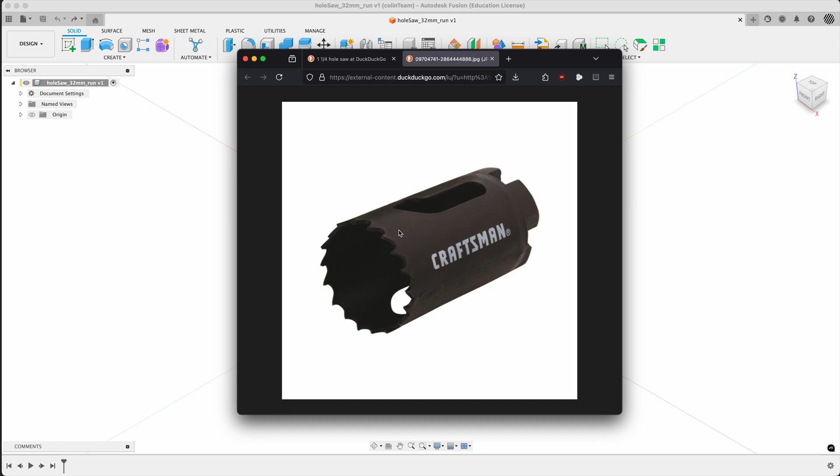We're going to draw our model, something like this, not this one in particular but similar. This is a fairly generic part, I believe from China, and they're good at this. We are going to model some of this, focusing on these teeth, particularly how they move in and out. We'll see as we go along what that means.

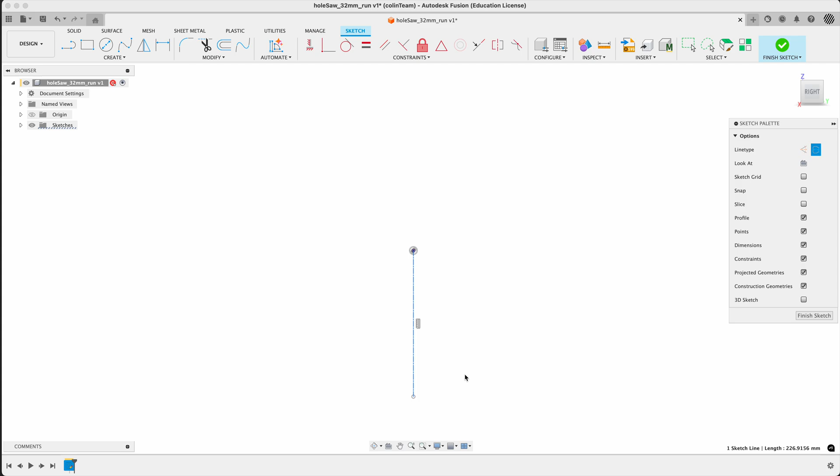We're going to start with a bunch of sketches, starting on the right plane, from scratch. The key thing is to keep it under control as we go. This is going to be a long and involved process, but I want to make a point of how this might be modeled and how patterning it is maybe not as obvious as it seems.

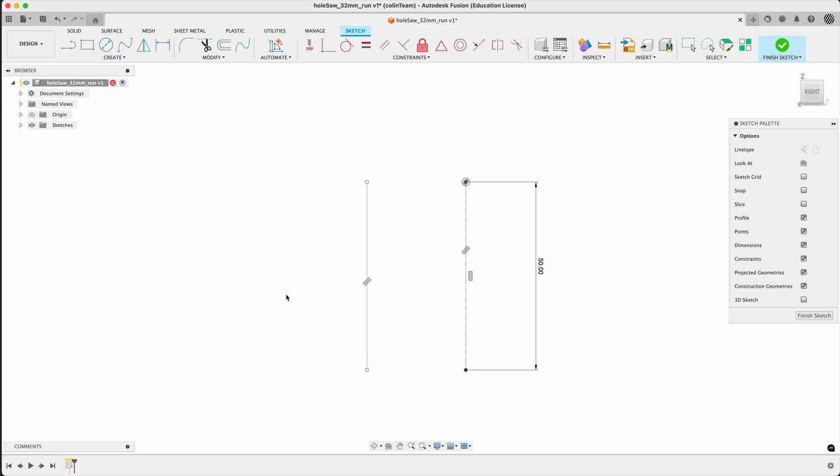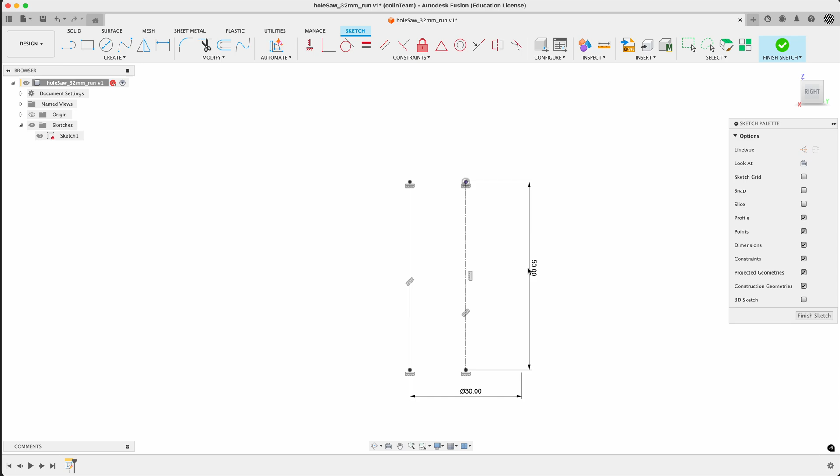Just setting up here, I'm going to make a plane, a surface revolve that's going to keep my part organized, and just working away bit by bit. Now you can see we're getting out of control. Sketch one isn't fully working, but the goal is to try and keep everything organized, doing tests as we go to make sure it all works.

So what are we going to do here? Finish the sketch, make sure everything's working right. This is a millimeter part. The guide I'm using is actually in inches, but we're going to convert over.

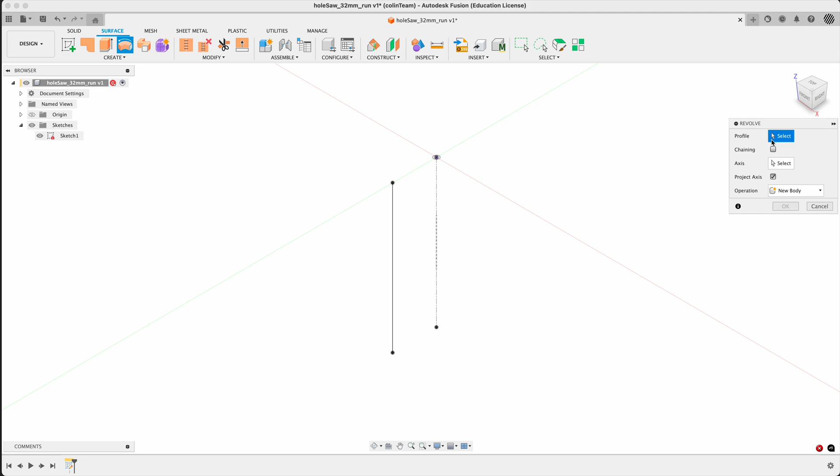It's selecting a profile that's not what we want, and maybe our axis is not what we want either. Let's make sure we've got it right. This is our profile, and that's our axis. Now this will make a surface body. If we look at it from the top, there's no thickness here, so we're going to start with surface bodies.

Let's keep things under control by renaming things, profile_lateral. And we're going to have some profile teeth coming here. Now the tooth is 3 millimeters high, and I'm going to put it in the middle here. We'll use that to actually control the second sketch.

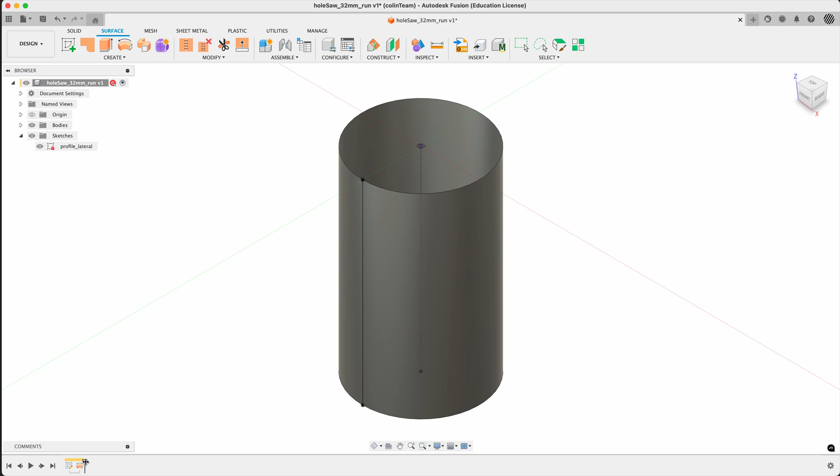So I want to insert this at the front. Let's do a sketch on, doesn't matter which plane, we can use the same one, why not. I could put it all in one, but I'm going to make a point here. It's feasible to do this in one. Oh, doing this wrong.

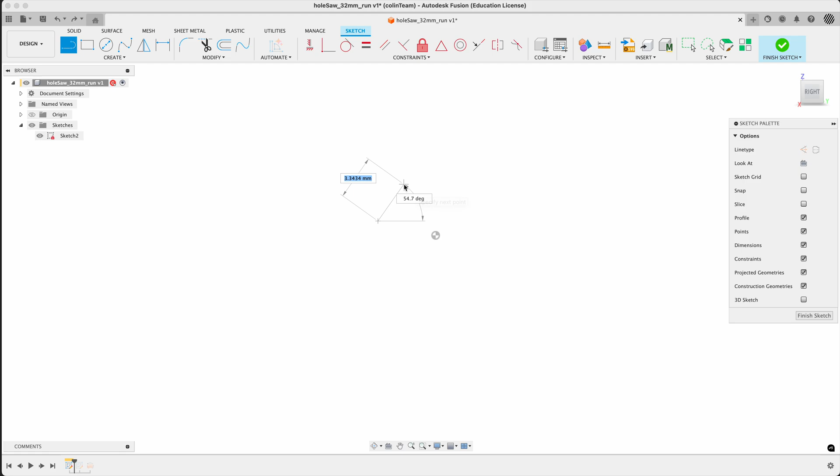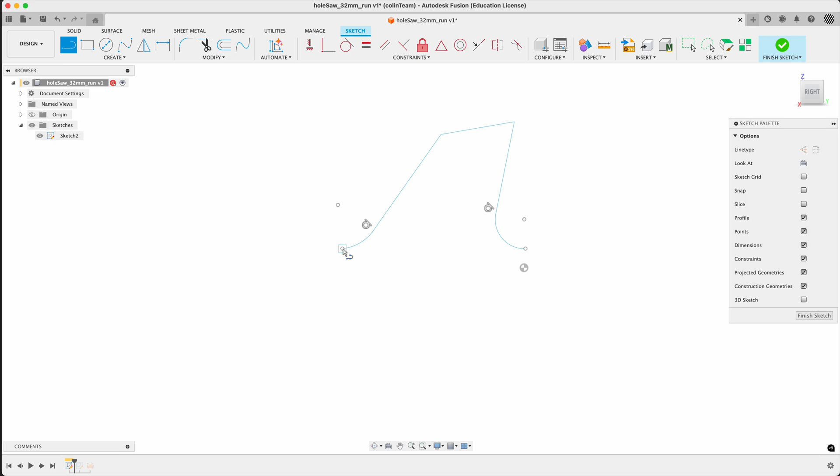I'm going to start by drawing this quite small, trying to get the size about right, about 3 millimeters range. Just get started up here, finish it there, pull this one away as well, try and get it lined up. Oh, missed that. Line these two guys up as best we can. There's our origin there, so we're in the general vicinity. To move it all at once, just draw a box around the whole thing so you don't yank it out of turn, and arrange it somewhat like that.

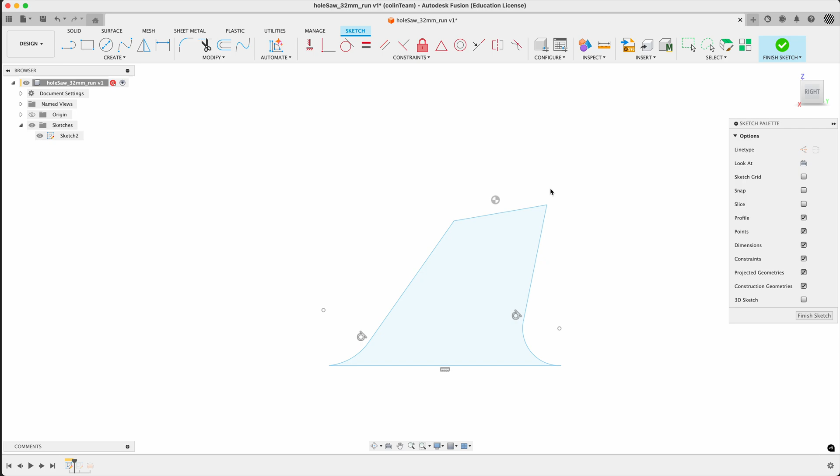And when we put our first dimension on here, we're going to start - like it'll get resized, we hope. So let's go for the full height, and that's 3. Let's make it obvious where it is.

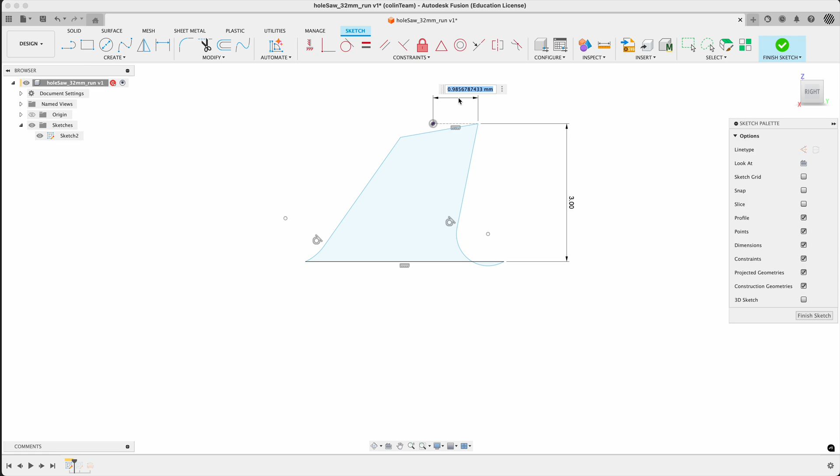That's our origin, so I'm just going to turn that into construction and then make it horizontal. Dimension that - to the origin, the outside tip is 1, and the opposing is the same. You can use a little formula if you wish, it's up to you. This angle here at the top is 15.

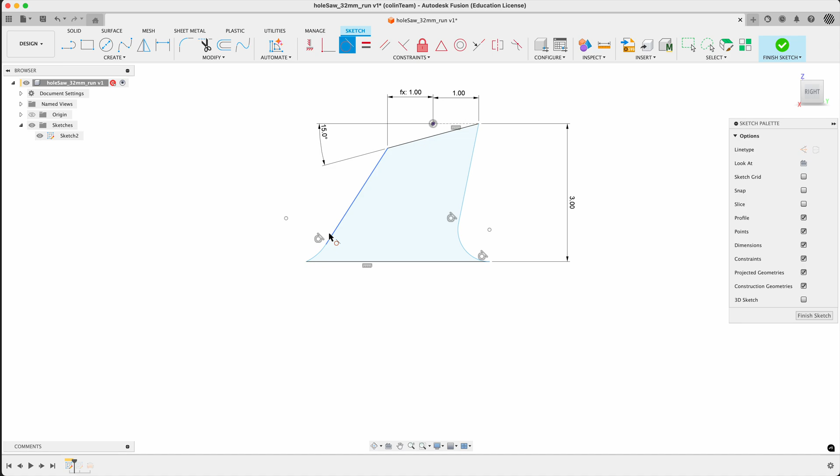So this is like a kind of cutting tooth, and we're going to go along here and just keep this all running smooth as we go. If anything jumps out of place, we'll just undo and redo. This seems crazy - we're going to use this to cut things away, so this is not going to be a zero thickness tip here. Just going to keep our eye on it though.

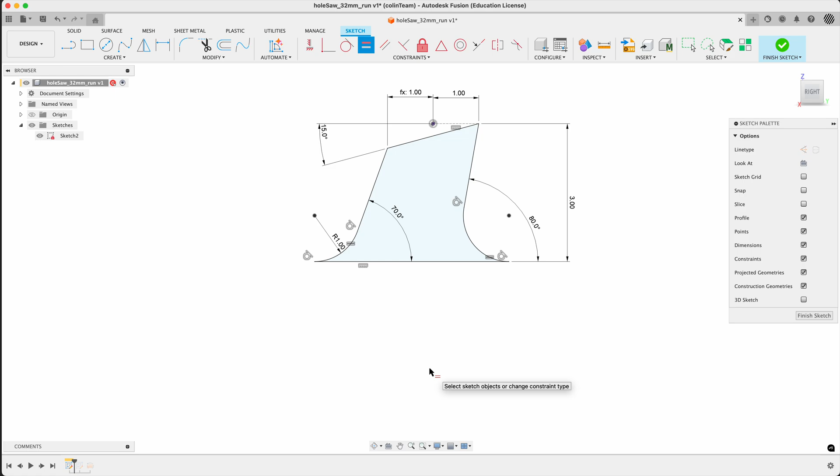So this angle here, the front angle is 70, back angle 80. This is 1, and these are equal. It's looking okay, that's about what we want. So fully defined - that's sketch 2.

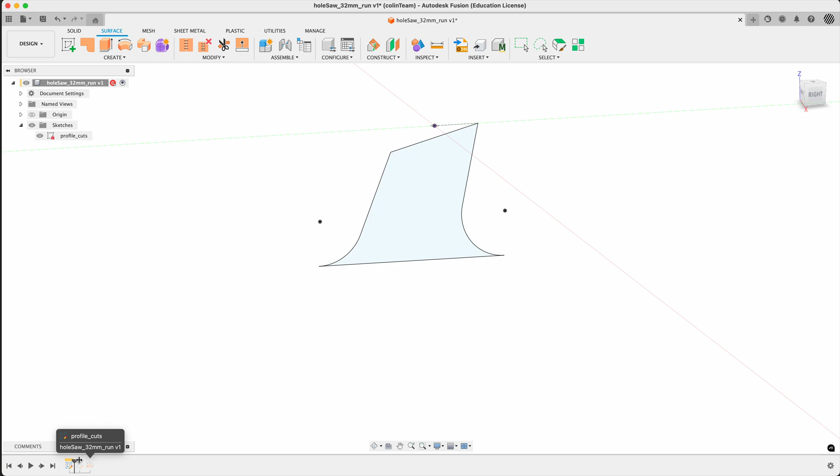Let's finish that sketch and call it profile cuts or something like that. This is again going to be our first sketch - I don't like that, let's rename it, underscore cuts. Perfect. Then when we pull our playhead out, we can see where we are. So next sketch, the first sketch we did.

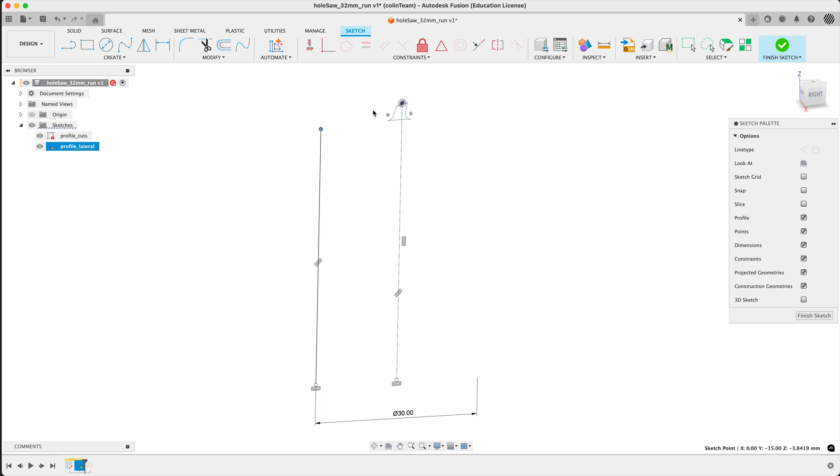It's going okay. Now what I want to do is add - I want to have this stick down 50, so the tip of the thing is here. So I'm going to actually change this around a bit. Let's edit this sketch, and I'm going to get rid of that constraint because I want it to go this way. So I want this actually lined up with the bottom of my tooth profile.

This is very important because we're going to do some trimming later. From here, I want this part to be 50 again, so let's dimension that one more time. From end to end, it's not 46, it's 50. Perfect, so we've shifted things around to accommodate the tooth.

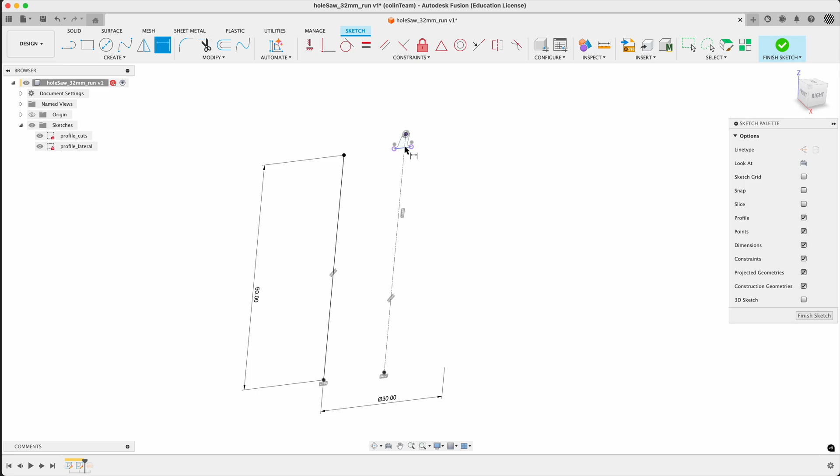And next we're going to go ahead here and see how this works. I want to cut this tooth into my sweep, into my revolve. Let's finish the sketch and go to the end.

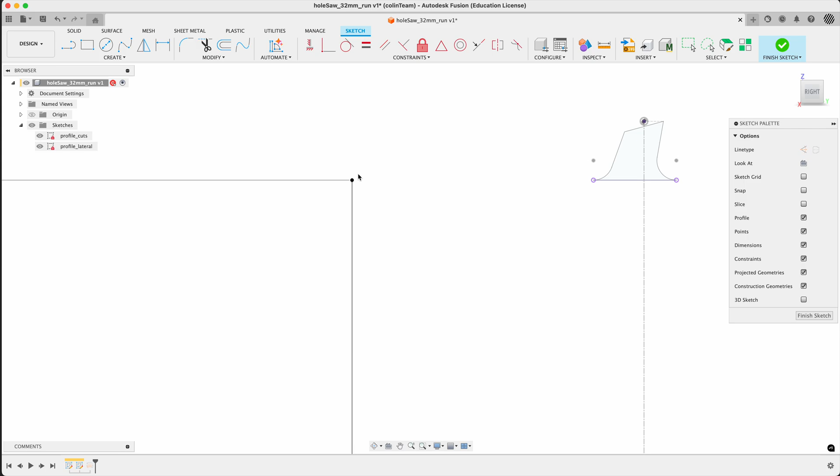Okay, so I need to add more to the top of this revolve. Let's edit the sketch. Problem with these teeth is they go out alternately. It's hard to see on this, but one sticks out, one sticks in. There's 16 teeth.

So let's do some thinking here. I'm gonna say one is gonna come outward, so that'll be tangent. Let's go across, come back down, and may not get it right. So just drag things around a bit. Whoa, let's not do that.

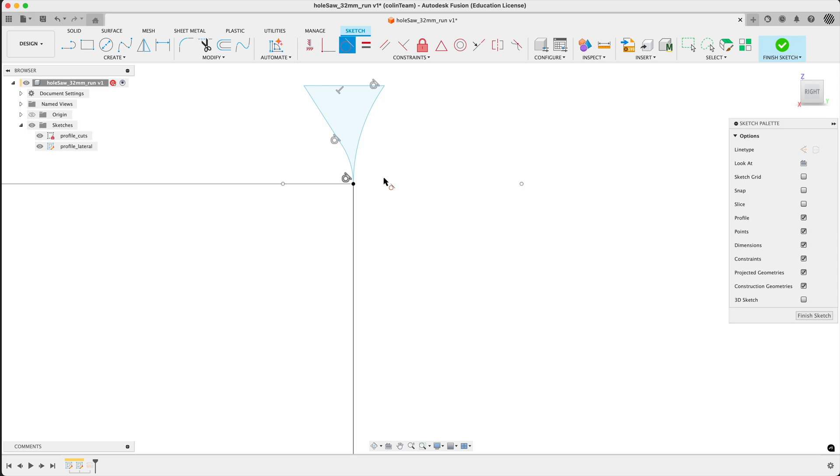Sometimes it's hard to drag, so you just pick them both. Constrain them all up, and we want to go ahead and get these all lined up. Try and keep everything kind of samey. Don't need this top edge except for construction.

What's this perpendicular to? Don't know. I want it to be horizontal. So let's also make these two guys horizontally correct.

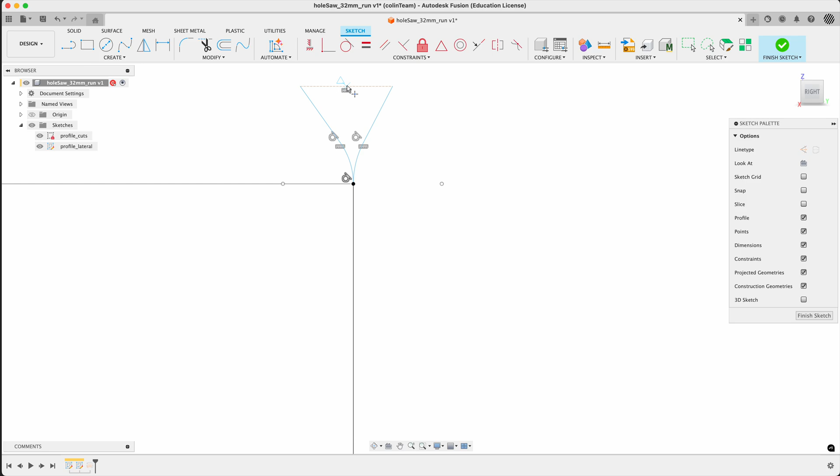And if I put a point here in the midpoint, wherever that was, there it is, and line it up with the line underneath, we can get some crazy stuff. Hold on here.

So just keeping this under control. Oh, that's not quite right. There we go. So what's our dimension here?

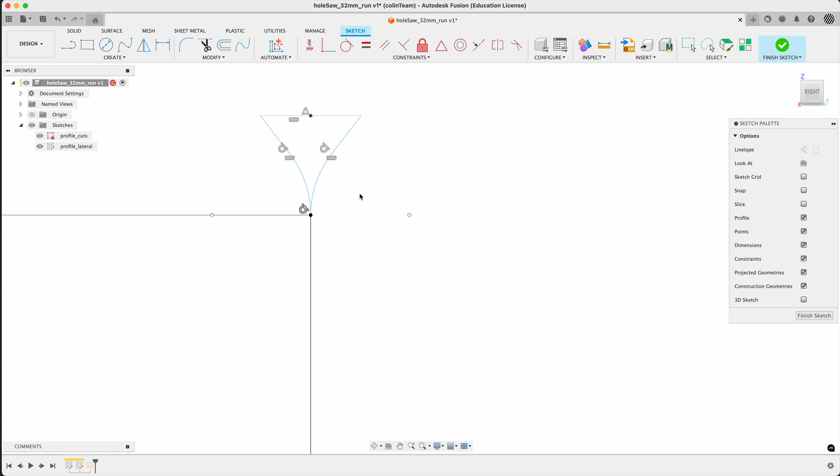I wrote it down somewhere, you can hear me rooting around here. First things first, I want this line to be coincident with the vertex - or sorry, not the vertex, the origin - because we want this to line up at the top of our tooth. Perfect.

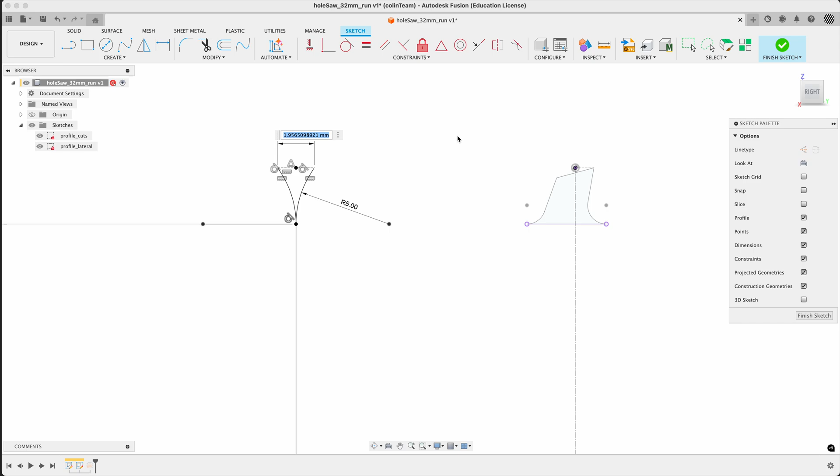I'm going to put some dimensions and stuff like this. So let's make this quite gentle, 5. And I measured the piece that we have quite a bit - it seems to be 1. So the movement of the teeth from side to side is 1 around the midline of our shape.

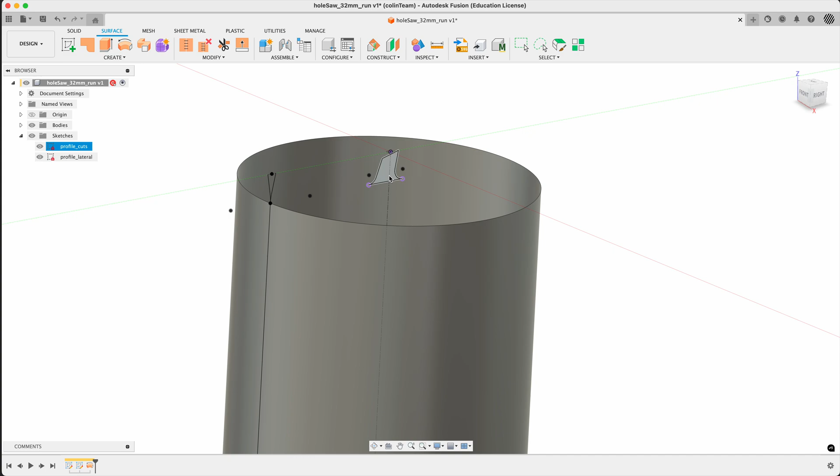So this defines everything for us. Right now you're wondering, okay, that seems fine. So finish the sketch. What I want to do is trim a top shape alternately with this profile here. I'm going to come back to this in a second, but I need to make my teeth.

One temptation is to make this whole thing twice and cut it away. This is, after a bunch of testing before I made this video, complicated. It's actually easier to use surfaces - we're going to go through here and use features like crazy. But what we're going to try and do is keep it managed, which is most important here.

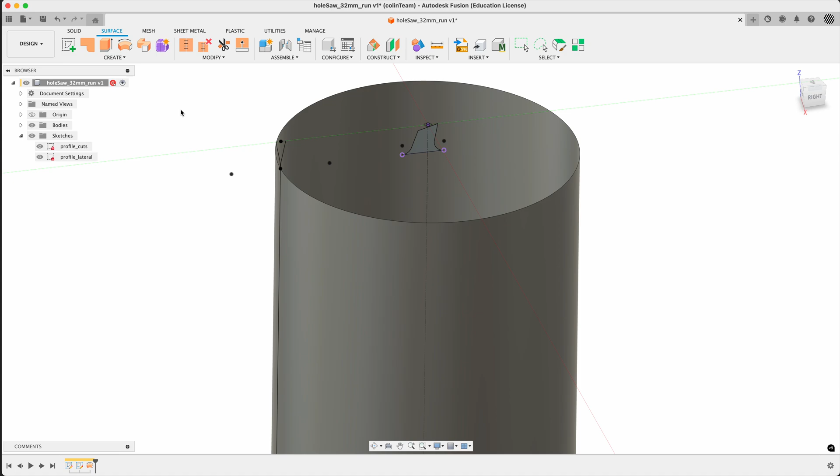So let's go ahead and do another revolve. I'm going to hide the body I've already made, body 1. And it's pre-selecting some stuff here, so let's be clear what's what. What I want to do is pick a profile, turn off chaining.

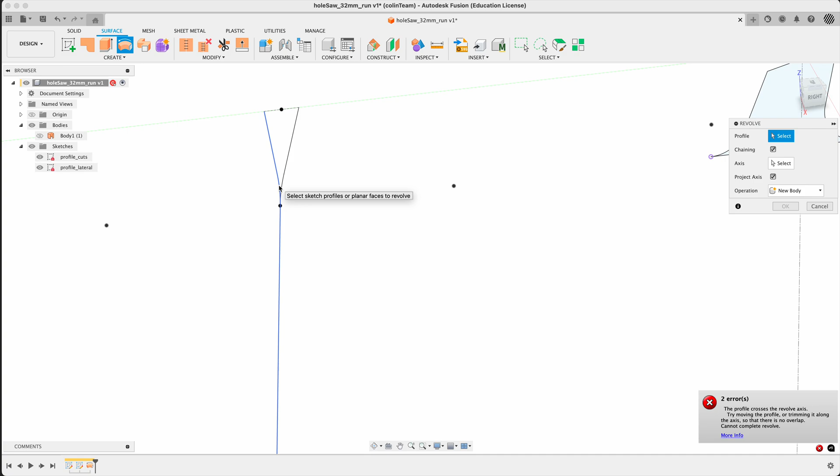Let's do the outside one first. So turn off chaining - there's my profile. It shows as 1 because it's tangent. Axis is that middle one again.

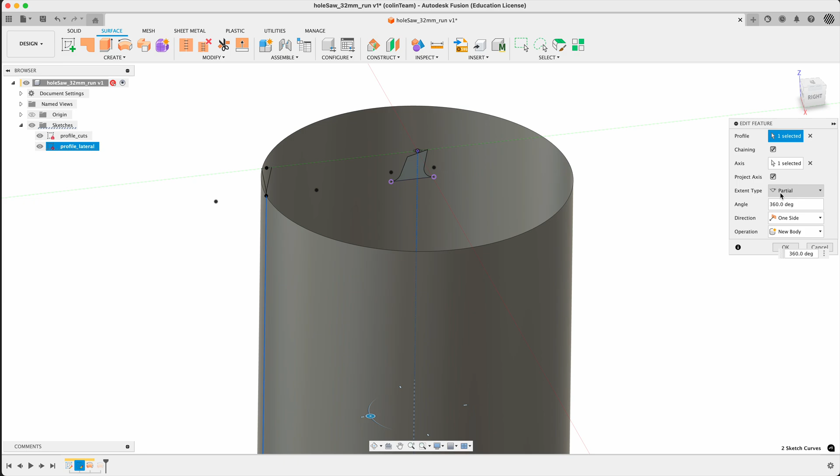New body - you can do full here if you want. Sorry, okay, let's go back and check the other one's full. There we go, 2 bodies.

Do it again for the inside one. It's not my redo buffer. Again, it's pre-picking some stuff that I don't like. Let's do it manually - chaining is turned off, and the axis is this.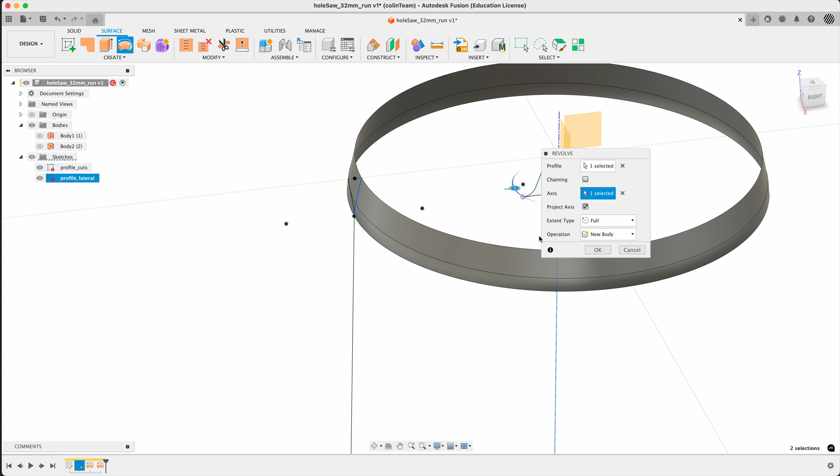Full, okay. Hide the sketches for a moment, have a look at the bodies. Looks good.

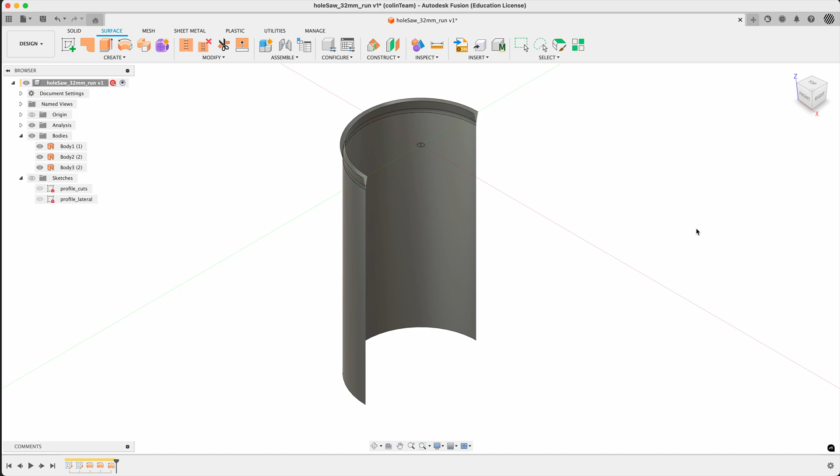I'm going to do an inspect here so I can see through things. If I can get it to pick a plane, there we go - Shift N if you want. Oh nice, yellow - there's all my shapes.

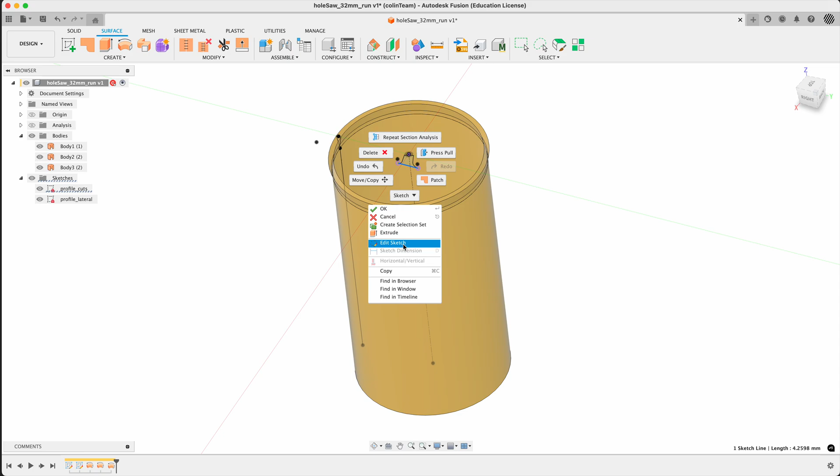What I want to do here is actually split the part with this sketch right here. There's various ways to do this - you can use just the sketch, you can make shapes, all that sort of stuff. I'm just going to edit the sketch here quickly to get rid of this extraneous line.

I'm going to turn it to construction. So we've got our tooth shape. What I want to do is actually make it - I've found it easier to make an extrusion here also as a surface and give it some length that you know is going to extend.

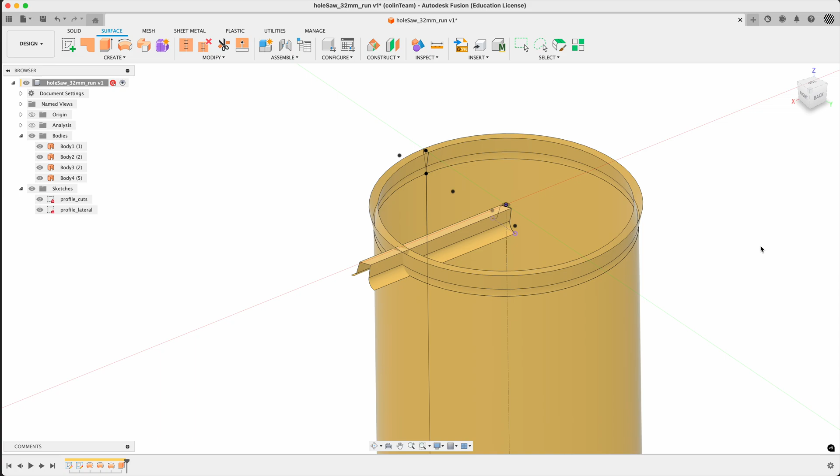We can use parameters for this, but for now let's just make it 20. I can actually split these surfaces with this surface extrude - see how this works in a minute.

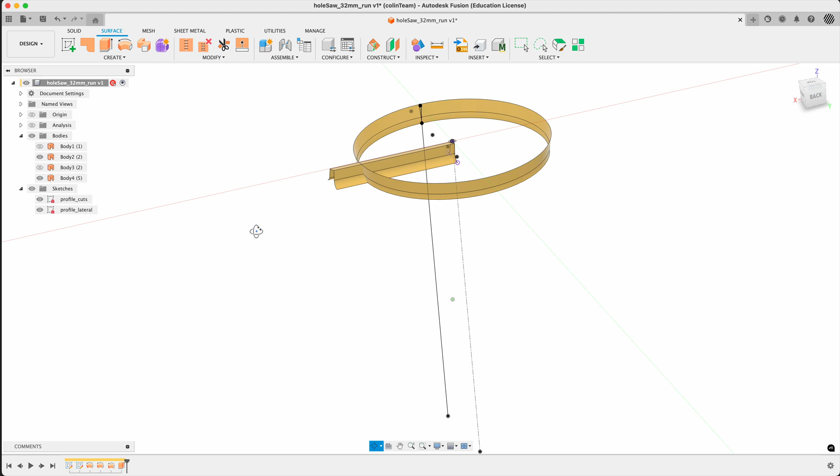So first, I'm going to go ahead here and do a little test run. First body is not really helping me right now. I'm going to do the outside first, so make sure the right ones are showing so I'm not confused here. Can even hide the sketches if you wish.

So my goal here is to use this tool to split this surface. So let's try that - split.

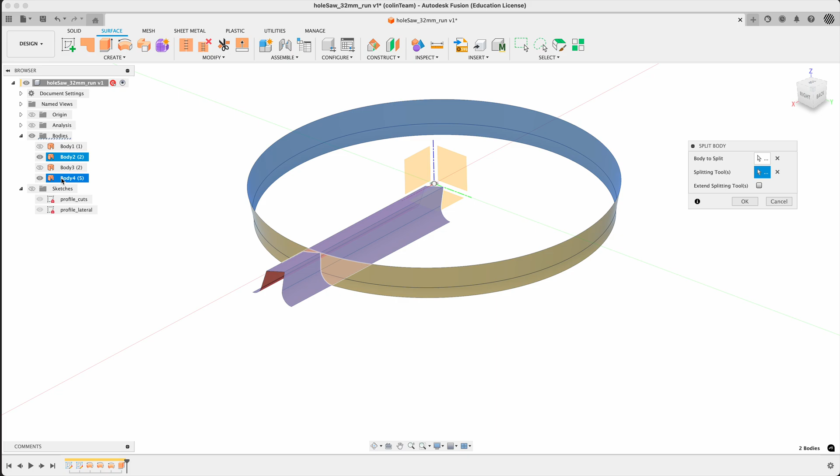Split Body works on all sorts of bodies. Body to split - well, that's this guy. Splitting tool, that's sometimes easier to pick in the browser. Looks okay, you don't need to extend it or you'll get both, just that one. We end up with extra bodies.

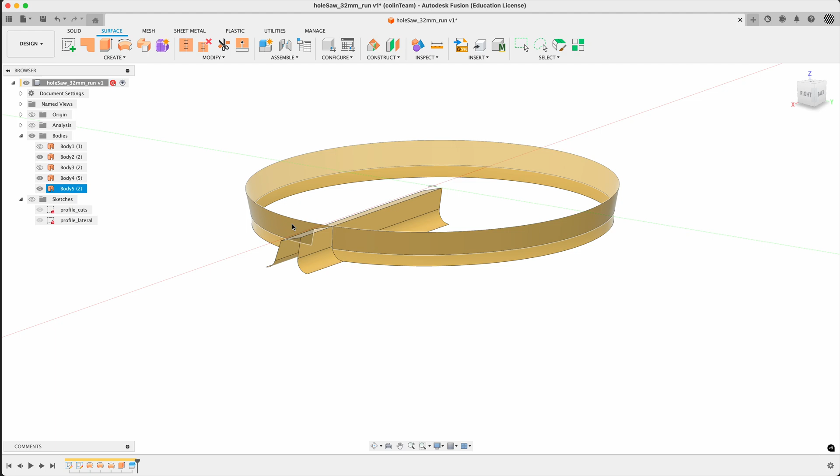If you wish, we're not going to need this anymore, but what about the other side? So the goal here is to see if we can figure out what to do. Just press delete there first. We end up with this interesting little shred of a body, which we can attach later to this bigger body. That's what's going on. So given all that, let's hide this again.

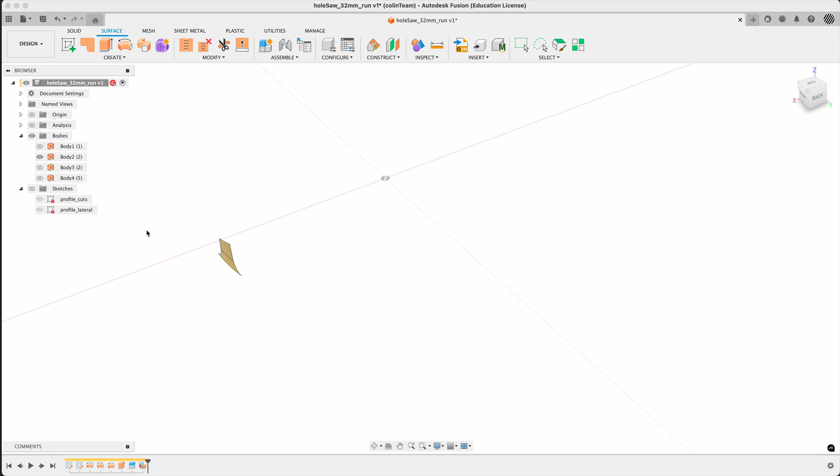Show - is it this one? Yep, and this body? Yep. Now before we do the split, let's go ahead here and actually multiply up this one that we're interested in, this body 5, body 4, whatever we want to call it.

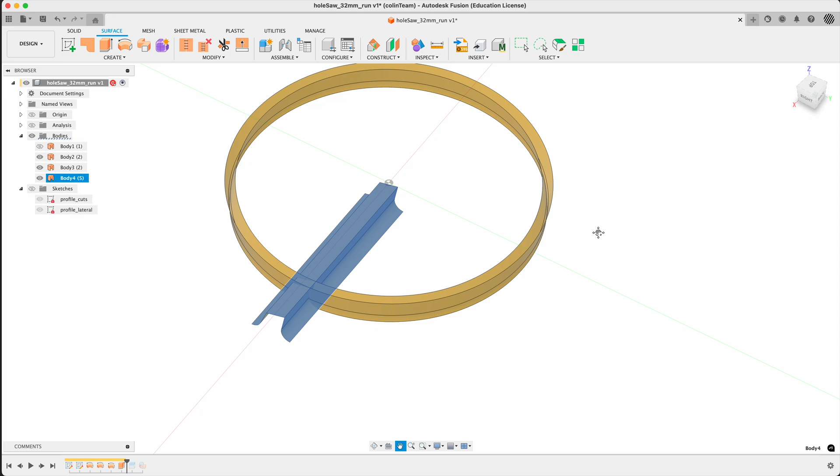Easy way to do this, we have 16 teeth. You can use the move command, which is okay, there's no problem with that. However, it's hard to use parameters with it. One good way to do this is actually to make a pattern.

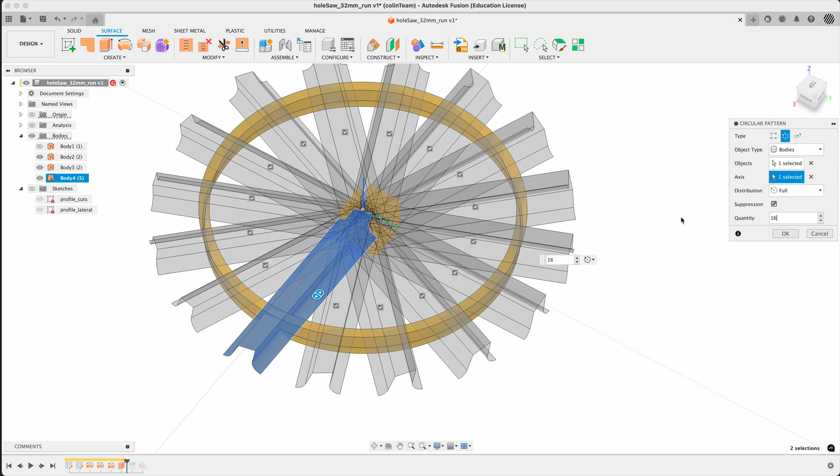Circular pattern, bodies selected, axis Z, number of teeth - now we don't have number of teeth, so hold on here, it's 16. We'll put a parameter in this in a second here. So 16 teeth. Strange, and you think well that's a lot - that's more than I only need this one.

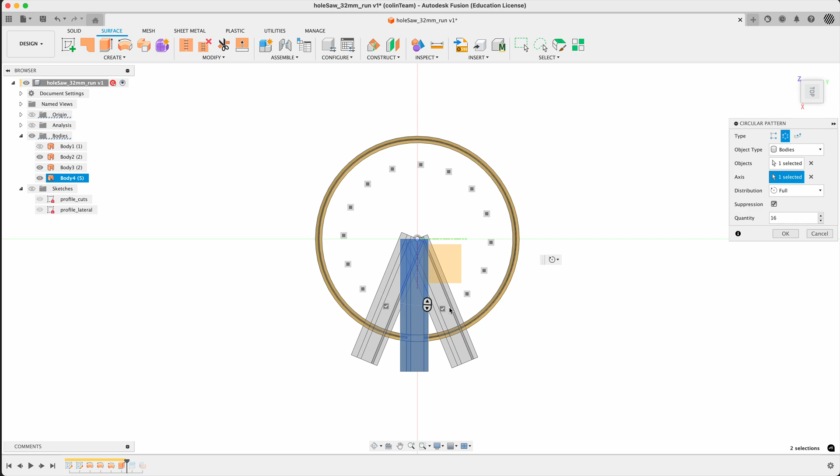Suppression is our happy friend here. We can turn these off. Yeah sure it's a bit of a pain and it's not fully controlled in this model. However, we can use a formula or something to control this, turn them all off essentially. You can also do distribution partial, you can do 1 or 2, you can turn off suppression if you wish.

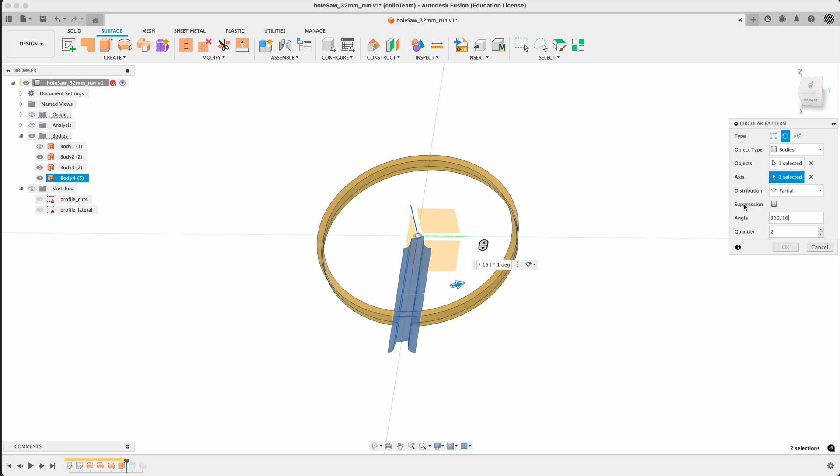And our angle is, what is it, 360 divided by 16? Right, so it's - oh, that's not right.

Let's make our parameter first. Param, so we know what we're planning here - number of teeth. I'm just going to call it NT. No, I'm not, noT. This is unitless, 16. Number of teeth.

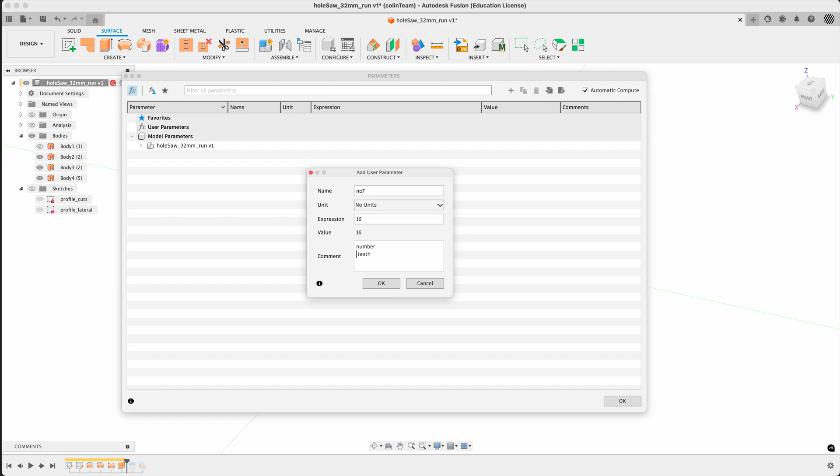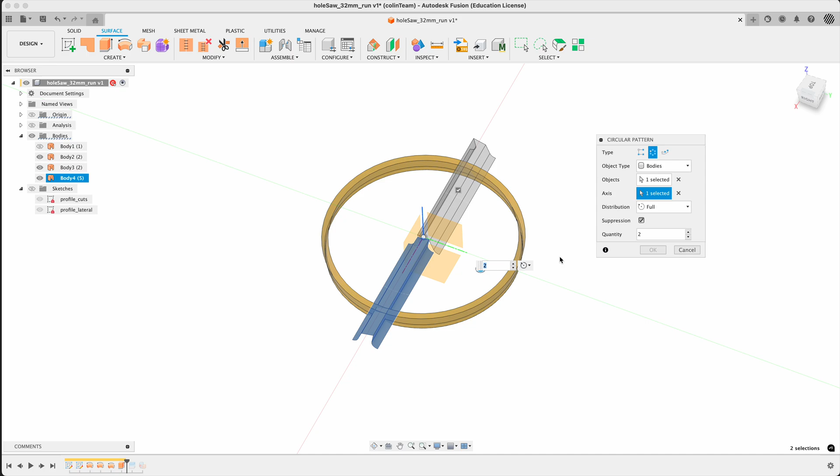Okay so let's do that again. I'm gonna pattern, circular pattern. I'm gonna do this the brute force way here, which is bodies, this guy, axis Z. I'm gonna go for number of teeth, 16, and suppress them. I'm making a point here - there are other ways to do this but I'm not gonna get too crazy here. Just go around, get rid of them all except for that one. For those who find this inefficient, too bad.

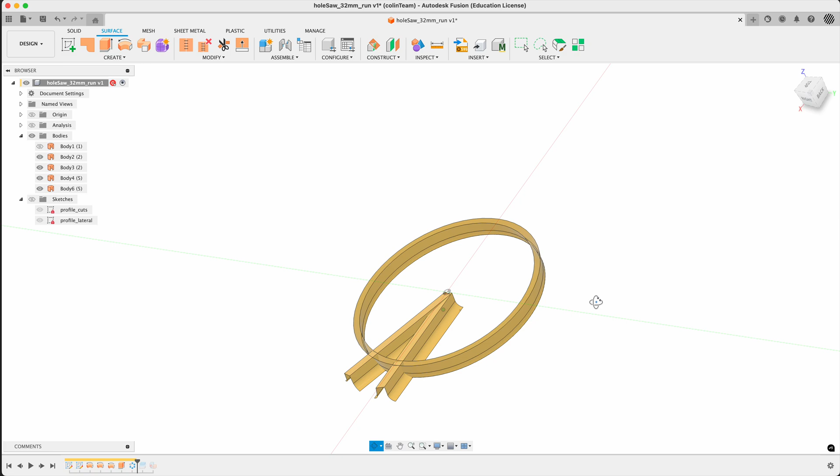Full, all that sort of stuff. We get 2 teeth after all that. Step forward and step forward. Right, now it's sometimes possible to use one split to do it all, but I've had no luck this time.

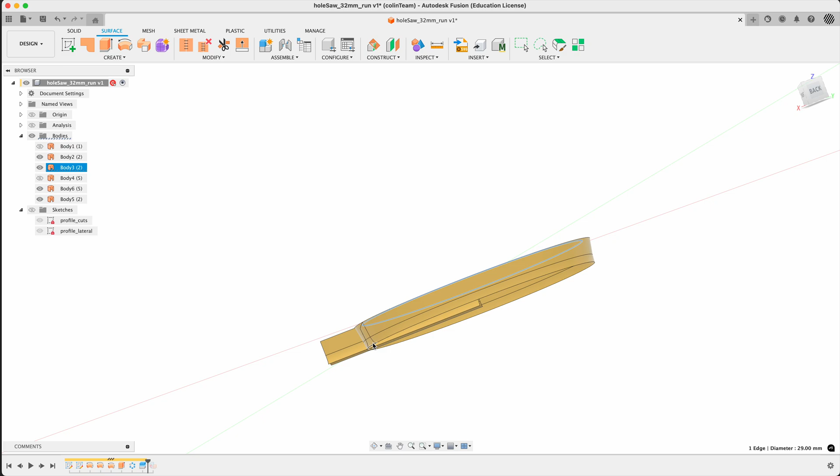So figure out which body's which, and which one did we do? Let's have a look - that's that outside one. So just hiding stuff that I don't need to see. Leave that one, and now a split.

This time we're splitting this body with this guy - nope, with this guy, with - notice it's easy to pick a piece of the body. Don't need to extend, and say okay.

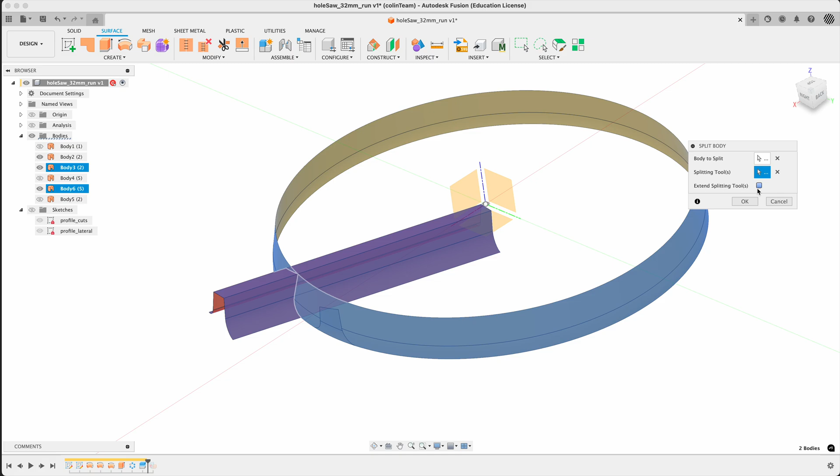Show all the bodies. Now we can kind of get rid of everything with this. We need that one, so let's go ahead here and have this guy. Just deleting these all, old school.

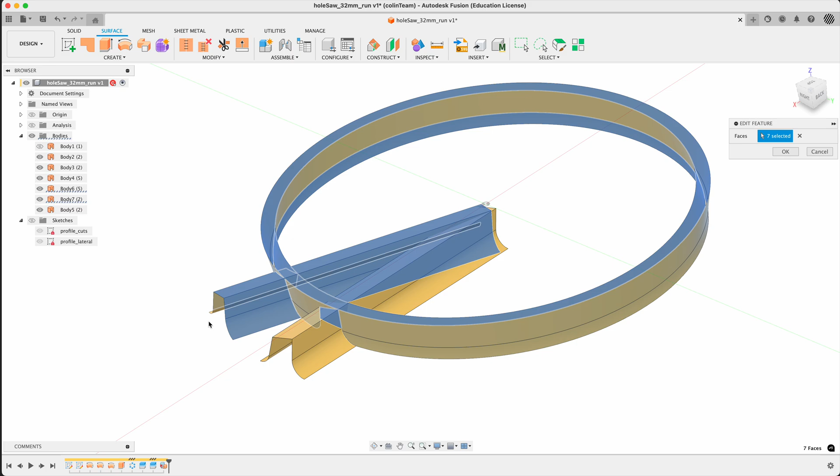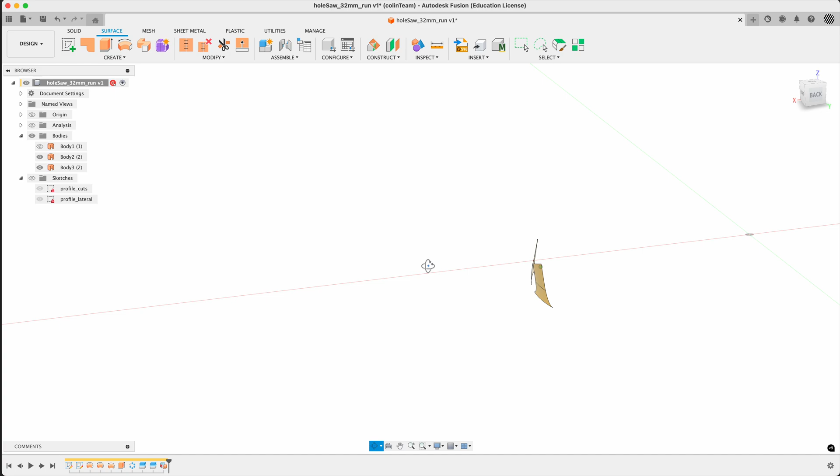See if it works. Missed one. Missed one, I think it's on this side. There we go. Show the body we've got. Ah, perfect.

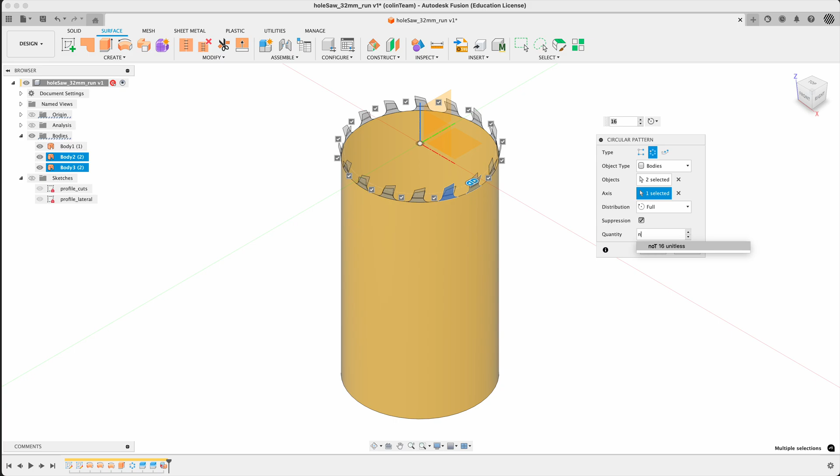Now next, need to pattern these guys out. Circular pattern, bodies, not the whole thing but just those 2 guys, axis Z again, 16 number of teeth. It's a little here - oh that's too many, because we've made 2, so we don't need 2, we need number of teeth divided by 2. Perfect.

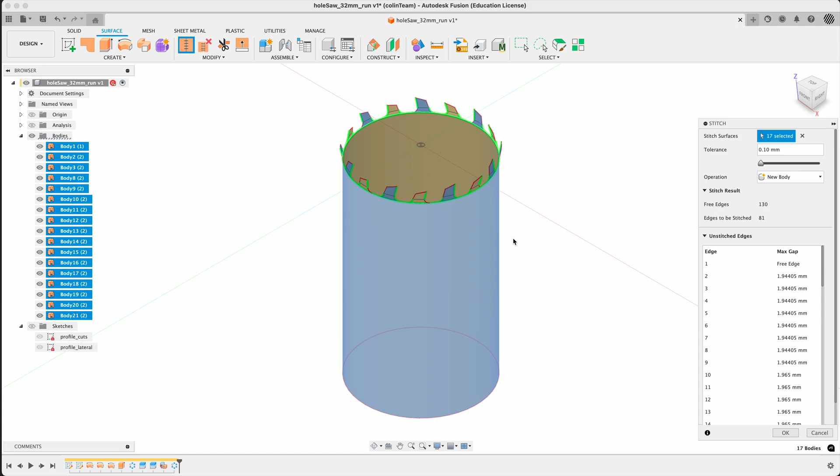It's looking good, tons of bodies - tons. But we're going to sort that out here. Stitch them all together, should show that everything's in tight. These numbers are between the 2 surfaces, or the 2 bodies, so that's fine. We should be able to stitch them all into one.

This might be a good place to do a little save, so I'm going to save this wherever it is. Just body's done.

The thicken is a notorious sort of crasher. Fusion's thickening tends to be not too bad as far as I've ever used. We'll see how it goes.

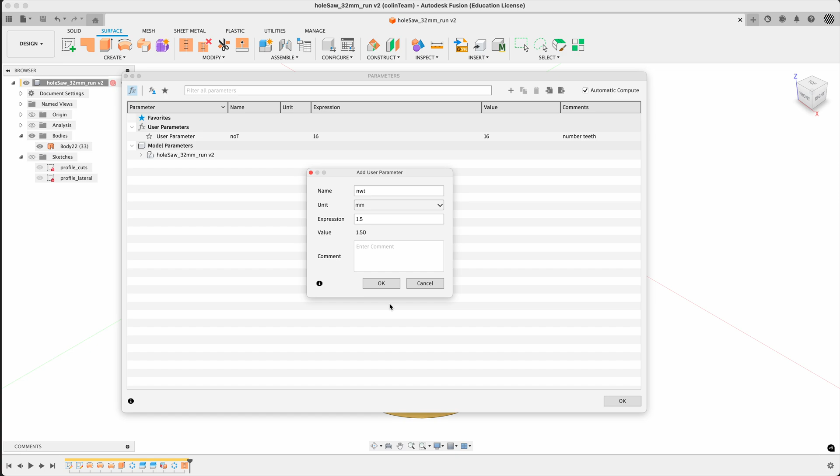Now before we do that though, let's go back to parameters. We'll go for nominal wall thickness here, and I measured it out to 1.5 millimeters. And NWT is nominal wall thickness as usual. Say okay, now let's do our thicken.

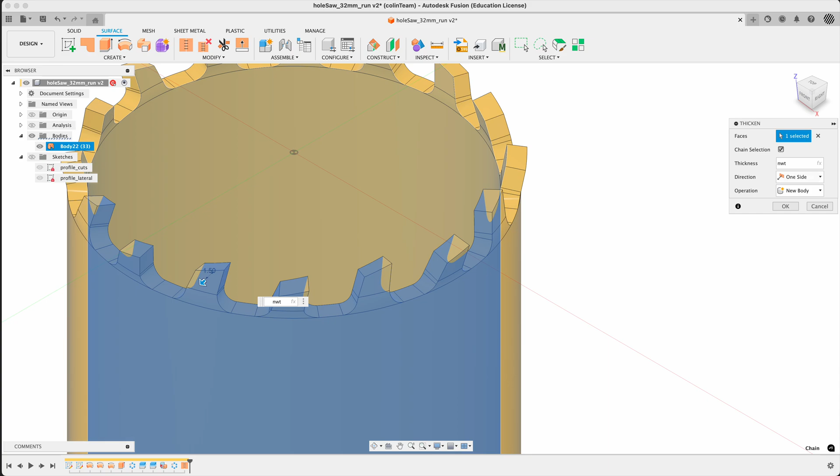And it goes right away, so it's not bad. And you can see where I've been fiddling around with it. Notice the distance though, if I have NWT here, it's outboard. If I change it to minus, it goes inboard. If I turn it to symmetric, it actually doubles it up. So NWT both ways - I actually want NWT divided by 2, which will give us the proper thickness.

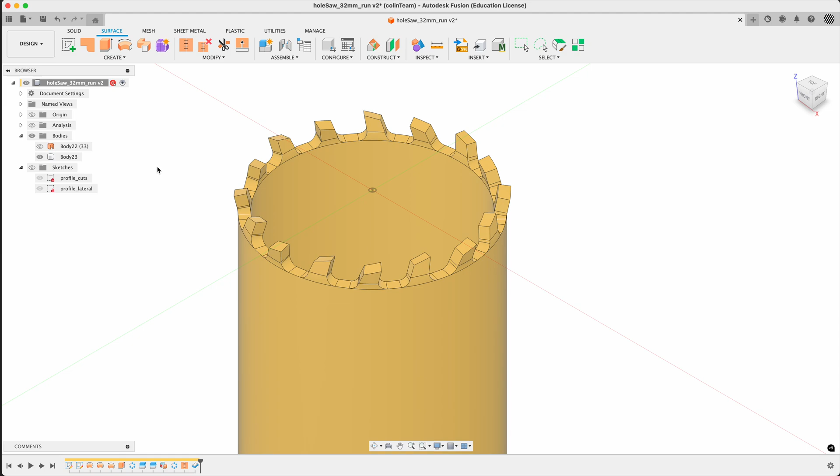It's a tidy surface, say okay. Replaces, well it kind of hides - it leaves it in there, doesn't delete that face. We've got body 23. All right, if we want to give this a different name we can. What would we call this? Shell - oh, shell.

Nice, that's going to be the end of our first video. This is going to be quite a few steps - we've already got a lot of features going on, we're going to get way more as we go, so I want to keep this under control. So thanks for watching so far, hold on for video number 2.